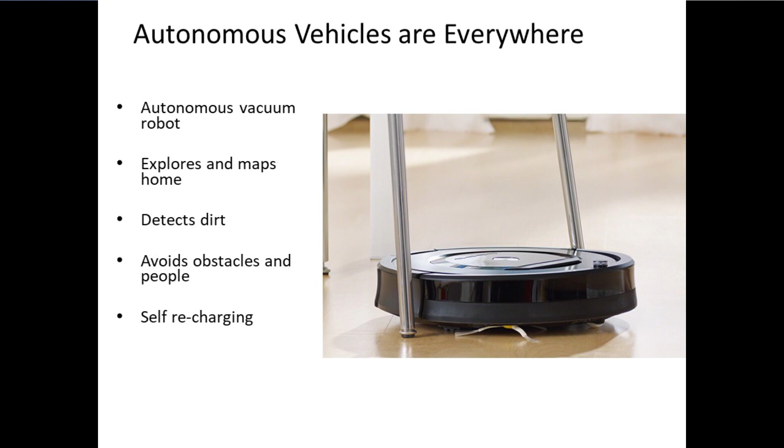In our world today, autonomous vehicles are everywhere. One of the most common examples is an autonomous vacuum cleaner. Even though they can be frustrating when they don't work, an autonomous vacuum is an amazing piece of technology. It explores your home, detects dirt and obstacles, and recharges itself when it's low on batteries.

Another well-known example of an autonomous vehicle is the Mars rover program. The first rover went to Mars in 1997 and remained operational for 3 months. The next rover lasted for almost 7 years and covered almost 5 miles. There are currently 2 operational rovers on Mars that have been there for many years and that primarily operate autonomously, capable of analyzing the environment using a variety of sensors and then broadcasting those readings to Earth.

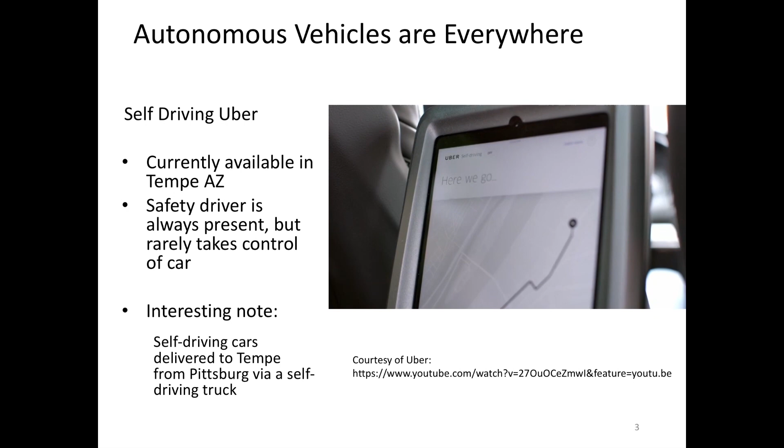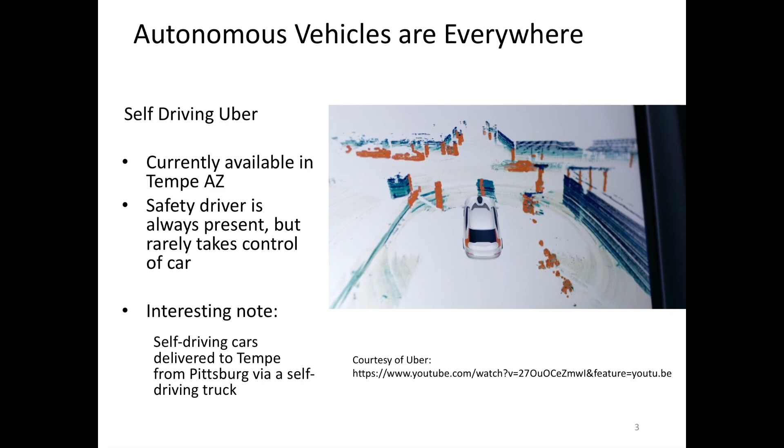Another example of an autonomous vehicle is a self-driving Uber. Prior to the recent accident in Tempe, Arizona, you could order a self-driving Uber where the car is acting completely autonomously, with the driver sitting in the front seat for safety reasons but not operating the car in any way. In the video you see a LiDAR system on top of the car, which is actually reconstructing the environment, will stop for obstacles, and is driving the vehicle autonomously.

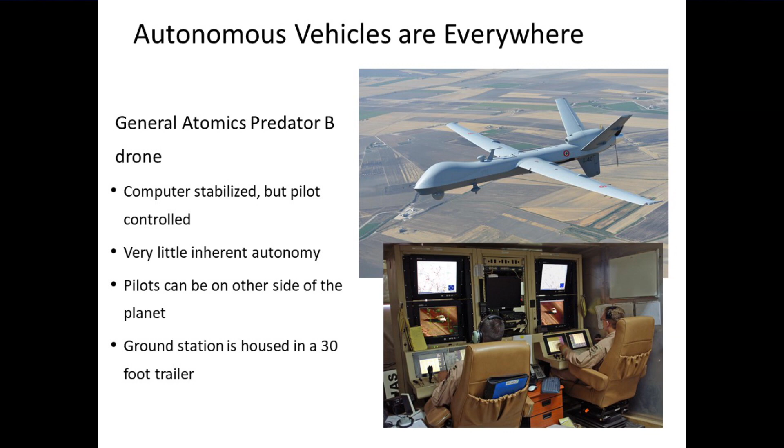As you know, the military has been operating drones for some time. The Predator drone is an unmanned but remotely piloted vehicle, piloted by operators who may be halfway around the world. At the other end of the spectrum, you can go to Walmart and purchase a drone with a camera for less than $100, or buy one off the internet for less than $50. There's actually some pretty sophisticated technology on these drones that uses sensors to stabilize the platform so that operators with very little experience can fly the vehicle.

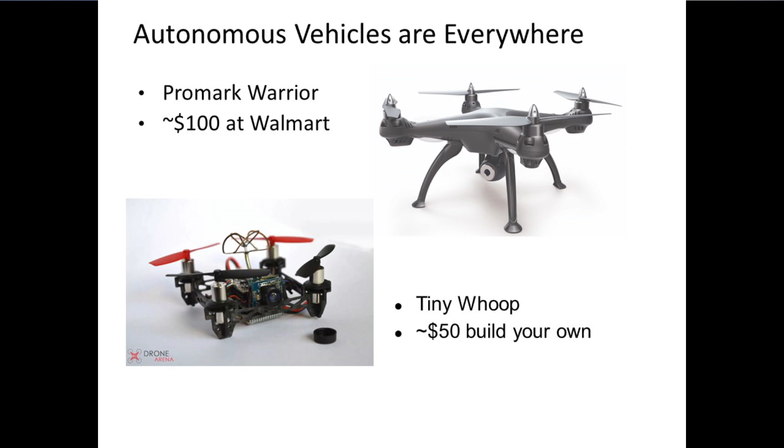Given the wide range of autonomy functions, the self-driving car industry has defined 6 different levels of autonomy, starting with no autonomy at level 0 and moving to full autonomy at level 5. For example, a radio-controlled aircraft, where the pilot maneuvers levers on his transmitter to directly move flaps on the aircraft, is an example of no autonomy, or level 0.

The Predator drone, or the Tiny Whoop drone, where the computer stabilizes the platform but the pilot directs and otherwise flies the aircraft, is an example of level 1 autonomy. The DJI Mavic shown in the previous video, where the pilot gives high-level commands like follow me or fly home and the computer flies the aircraft, is an example of level 2 autonomy.

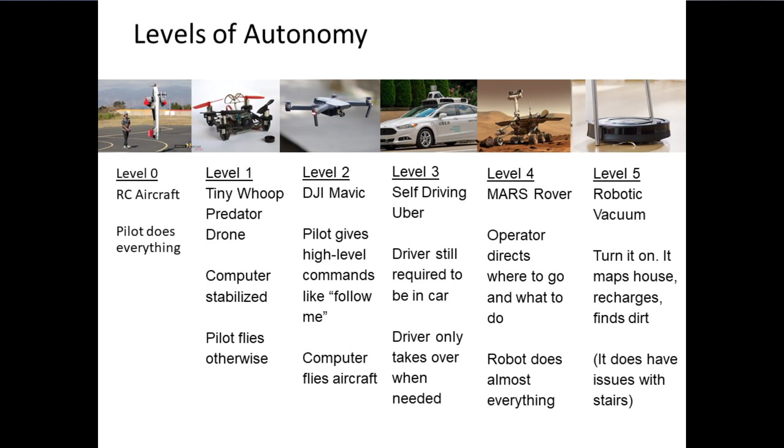A self-driving Uber, where the driver remains in the car but only takes over when necessary, is an example of level 3 autonomy. The Mars rover, where the operator gives very high-level commands but the robot otherwise operates autonomously, is an example of level 4 autonomy. Finally, the robotic vacuum, which in principle can operate without human intervention, is an example of level 5 autonomy. These definitions define the goals and objectives of the self-driving car and self-flying car industries.

There's no question that we are in the middle of a revolution in autonomous vehicles and autonomous machines and intelligent machines in general. But why is this happening right now? In the mid-1990s, when I started working at BYU, there were four technologies that had recently been introduced to the commercial market that would have significant influence on robotics.

These technologies would enable the current boom in autonomous and intelligent systems. The first is the Global Positioning System, or GPS. GPS was developed during the 1970s, primarily for the military. The first commercially available GPS receiver appeared on the market in 1989. The full constellation of 27 GPS satellites became fully operational in 1993, and selective availability, which artificially degraded GPS quality, was discontinued in 2000.

GPS is an essential technology for autonomous systems since it allows vehicles to know where they are on the Earth and to plan and execute maneuvers relative to their location.

The second enabling technology was the development of MEMS gyros and accelerometers. A gyroscope is a sensor that measures angular velocity, and an accelerometer is a sensor that measures acceleration. Gyroscopes and accelerometers are necessary to enable stable autonomous flight of traditional fixed-wing aircraft, helicopters, missiles, and satellites. They were developed and have been widely used in aerospace systems since before World War II.

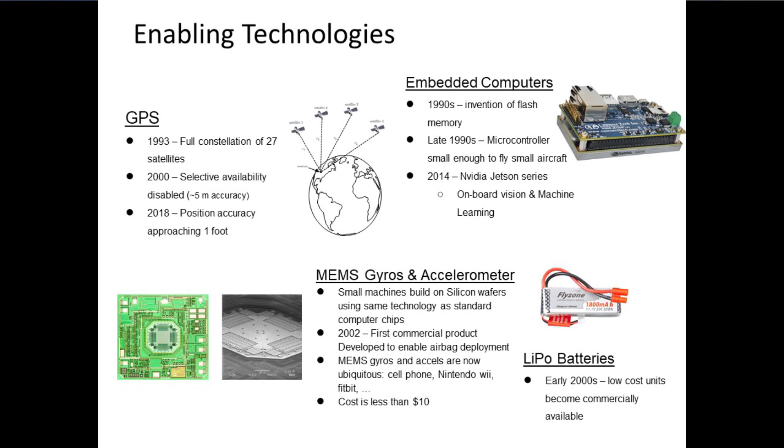The final essential technology for unmanned systems is high-energy density batteries. The lithium polymer battery found in your cell phone was first commercially available in the early 1990s, but it was not practical for use on RC-size aircraft until the early 2000s.

Therefore, in the early 2000s, when we were getting started, there was this perfect storm of available technologies that enabled unmanned aircraft and mobile robotics in general. However, the real enabler has been that each of these technologies are perfectly aligned with their use in consumer electronics.

Each of you here today are probably wearing or have in your pocket a device with accelerometers, batteries, and an amazing computer. And so the economy of scale has driven development and has made these technologies extremely inexpensive.

Self-driving and self-flying vehicles have two types of sensors. First, internal-looking sensors like gyroscopes and accelerometers, or an odometer in a car, and we'll put GPS in that category as well. Also external-looking sensors like a camera, a LiDAR, or a radar. The internal-looking sensors monitor the state of the robot itself.

Whereas external-looking sensors are used to monitor the environment, to detect things like pedestrians or buildings or things that might cause a collision. For example, on a self-driving car, the internal sensors include the wheel encoder and GPS. The external sensors include radar, LiDAR, camera, and ultrasonic sensors.

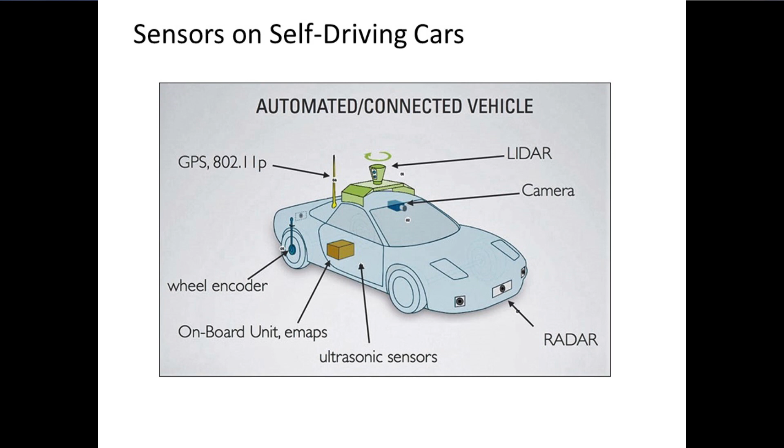The external sensors and the state of the aircraft are the input to a perception algorithm that estimates objects in the environment, like buildings, pedestrians, or other cars. A prediction algorithm then predicts what the environment will look like in the near future, for example over the next several seconds. A planning algorithm then decides how and where the robot should maneuver based on the predicted future.

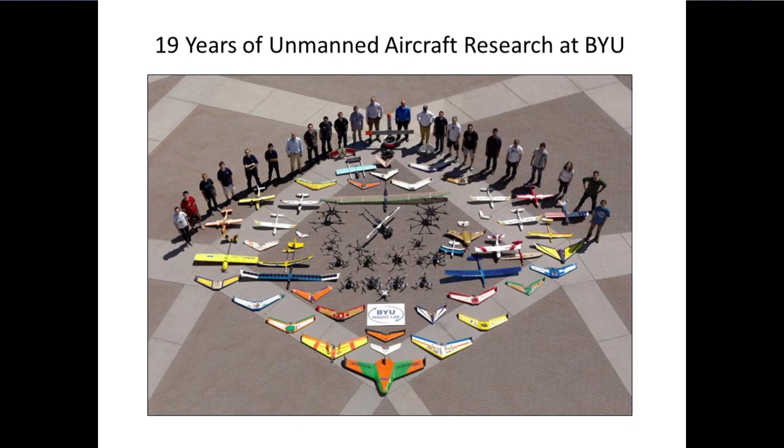For the remainder of this talk, I'm going to provide examples of each of these blocks by discussing some of the work that our lab has been doing in the area of self-flying vehicles. This is a recent picture of students in our lab with some of the aircraft that we work with. Our specialty has been small fixed-wing aircraft, but we are currently doing extensive work with multi-rotor systems as well.

Our research over the years has been focused in four areas. We've worked on cooperative control, where the objective is to develop algorithms that enable robotic vehicles to cooperate to perform tasks. We're currently working in the area of computer vision-based control, where onboard cameras and other sensors are used to reconstruct the scene and then maneuver a flying robot. We've also developed an autopilot system for small fixed-wing aircraft that resulted in a spin-off company and is currently commercially available. This video illustrates some of our early work on the Kestrel Autopilot system.

In the video, you see an aircraft that is flying through Goshen Canyon in Utah using optic flow sensors.

We've also done a lot of work on multi-aircraft systems, including formation flying, as you see here in the video.

This next clip shows one of our only recorded mid-air collisions with a successful recovery. It's hard to crash these things.

This next video shows a project we were working on where you had simultaneous arrival of multiple aircraft at the same point. This is difficult because of wind and other environmental conditions. And of course, autonomous landing.

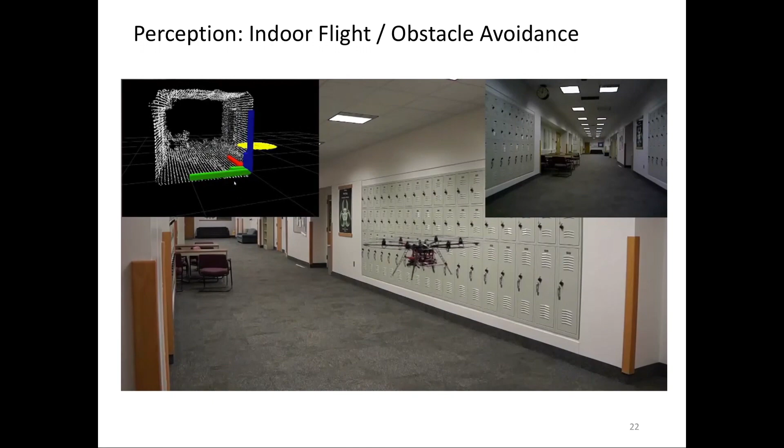You can see in the upper left, the point cloud model, you can clearly see the desk there in the environment that's being reconstructed in 3D from the video feed.

So how does this technology work? The basic idea is to identify similar features in two sequential video frames. For example, strong corners in the image make good features and are easy to identify by looking at color gradients. If the robot moves between frames, then there will be a parallax between the two images, and that parallax can be used to triangulate the 3D position of the features.

This is similar to the way our eyes reconstruct a 3D scene. The 3D position of the features can then be used to create a voxel grid map of the environment, as shown in the lower right corner, and then that environment can be used for subsequent path planning.

Potential applications of this technology include following, for example, a mountain biker through a complex environment. In the video, a 3D voxel grid of the world is being used to maneuver the aircraft around trees.

Another project we've been working on is GPS-denied navigation. In this video, a multi-rotor is navigating through the Fletcher building on campus using several complementary sensors, including an RGB camera, an infrared depth sensor, and a GPS unit that receives occasional measurements when it is outdoors.

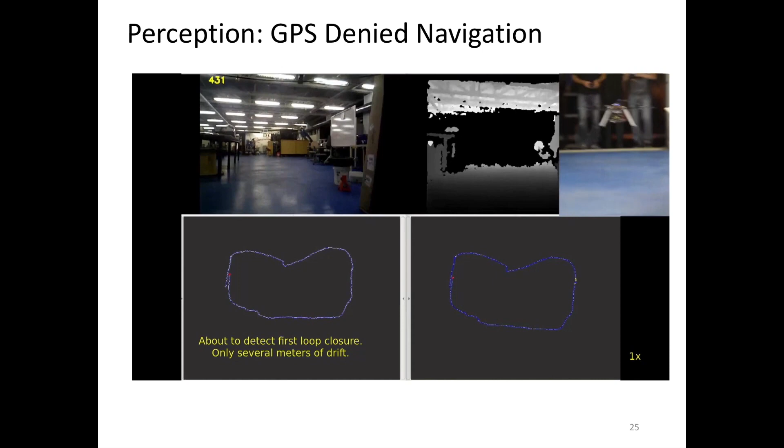The multi-rotor is first guided by a human to close a path in the environment. When it gets back to a position that it recognizes it's been before, you'll see in the lower right small yellow lines that indicate it has seen that position before. When it recognizes a position it's been before, it optimizes the map, and at that point can navigate autonomously relative to that map.

At some point, when it's outdoors, it'll receive a GPS measurement, as you'll see here in a moment. As soon as that GPS measurement is received, the robot can localize itself in the world. It knows it's on BYU campus, for example.

So how does this work? The robot begins in an unknown location, at least unknown to itself, and takes an image of the world, or a keyframe. It then moves and compares subsequent image frames with the original image to estimate its motion relative to the keyframe. It continues this process until most of the original features go outside the field of view, then establishes a new keyframe.

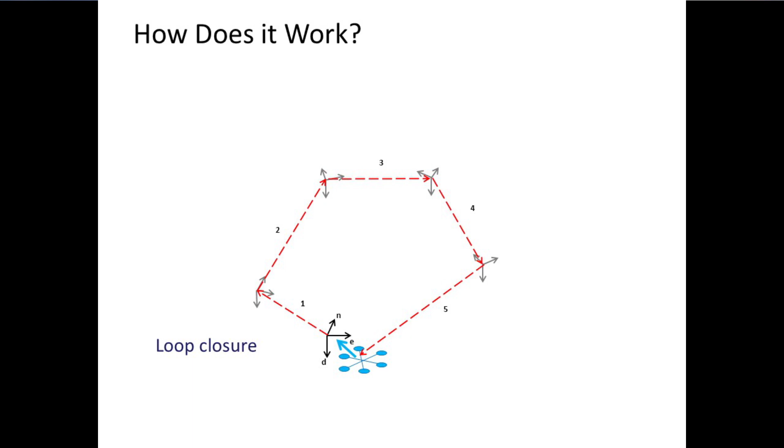The process continues until the robot recognizes that it has returned to a previous location, which we call a loop closure. The motion around the loop is then optimized to resolve discrepancies caused by noise in the sensors, producing a consistent estimate of its motion.

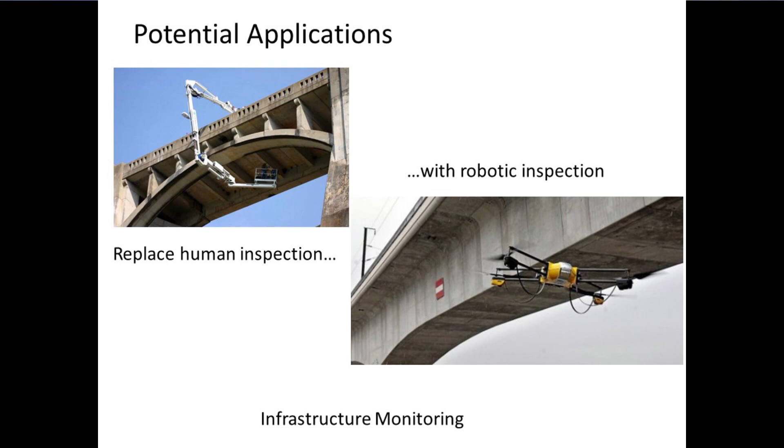There are many potential applications of this technology, but some include bridge and other infrastructure monitoring where GPS signals are intermittent or non-existent. I'll now talk briefly about prediction and planning.

This video illustrates a project we had several years ago where the objective was to use onboard computer vision to land an aircraft in the back of Dr. McLain's truck. The computer vision algorithm is looking for the biggest red object.

Of course, sometimes things don't always work out so well, and when it's looking for the big red object, it hits the tailgate. We were just glad it didn't hit the stop sign in the background.

So how does this technology work? The basic insight comes from ship navigation and missile guidance. The aircraft will be on a collision course with the truck if the truck remains stationary in the image plane of a forward-looking camera. Ship navigators use this idea to navigate relative to lighthouses.

Therefore, the aircraft is maneuvered so that the truck, or the largest red object, remains stationary in the image plane. Again, there are many applications of this technology, but some include drone package delivery - we're all waiting for that on campus, right? - and military convoy support.

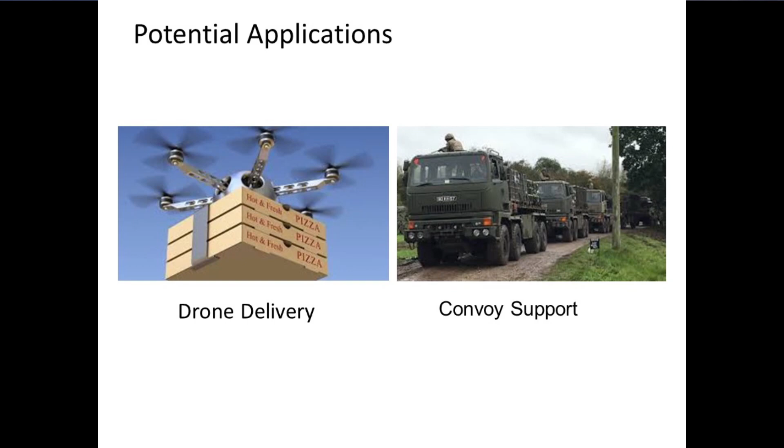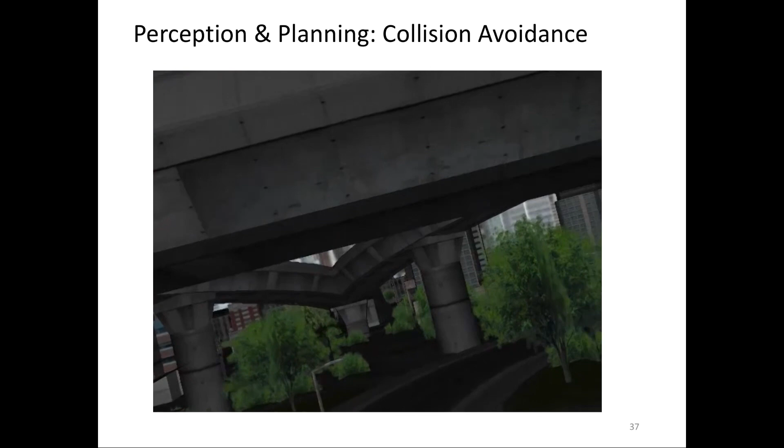Another area of research in our lab is path planning and collision avoidance. This video shows a simulation of a fixed-wing aircraft flying through a cluttered urban environment using computer vision to avoid obstacles.

So how does this work? Consecutive video frames are processed to create a depth map, as shown in the lower left of the video. The depth map is then processed to segment distinct objects in the environment, creating a low-resolution, robot-centric 3D map of the world, as shown in the upper right.

And then a path planning algorithm is used to create a trajectory through the world that will avoid obstacles, as shown in the lower right.

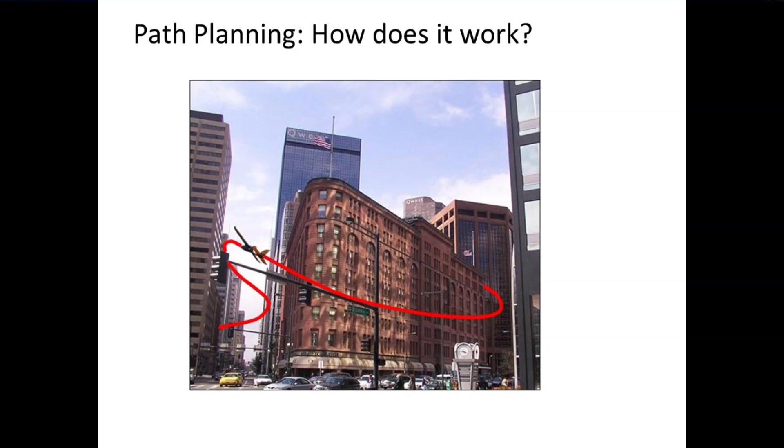So I've mentioned path planning a few times. How does path planning work? Path planning has been an active area of research in the robotics community for the past 40 years. There are many approaches to this problem. I'm going to describe one simple algorithm that's easy enough for me to explain to you, and that is computationally simple and has been successfully used in many different robotic applications.

The technique is called the rapidly exploring random tree algorithm. The algorithm is initialized with a start and a goal location, in addition to the location of a number of obstacles.

The algorithm then randomly picks a point P in the environment and extends a path from the start location in the direction of P. Another random point is generated, and the search tree is extended towards it from the closest point on the existing tree. If a collision is detected, the point is discarded and a new point is randomly selected.

The process continues until the tree can be connected to the goal location. The RRT path planning algorithm, although very simple, has been successfully utilized in a variety of applications, including unmanned aircraft, self-flying cars, driving on slick roads, robot manufacturing, and even solving those little games that you get for Christmas that drive you crazy.

Where is all of this technology going? Currently there are major advances happening in two related areas: autonomous aircraft systems and self-driving car technology. In the future, these technology thrusts will converge and result in the next revolution of self-flying cars.

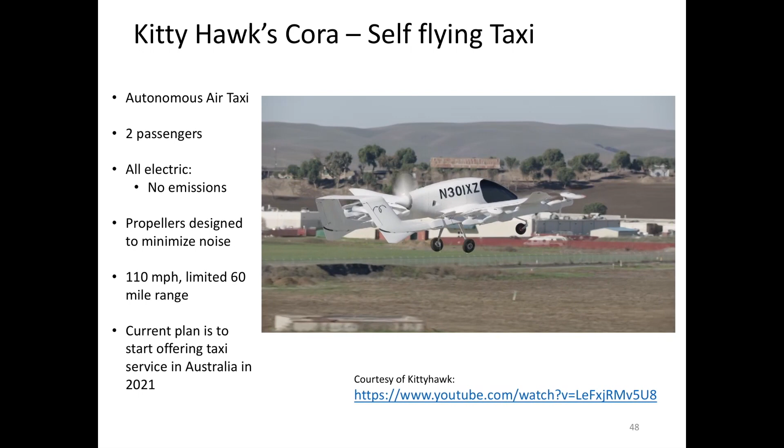In the video, this aircraft is flying completely autonomously. The concept is that the self-flying taxi will operate much like a bus service. You go to a terminal pad, get in the self-flying taxi, use your smartphone to select the next terminal pad you'd like to go to, and the taxi will take you there.

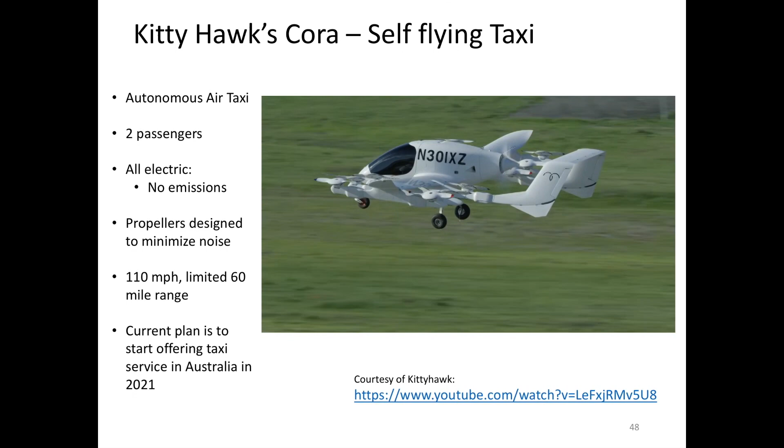The aircraft in this video is an electric vehicle with a limited range of about 60 miles. You'll notice that the upward-looking propellers on the wings are very short and stubby, which reduces the noise pollution caused by this aircraft.

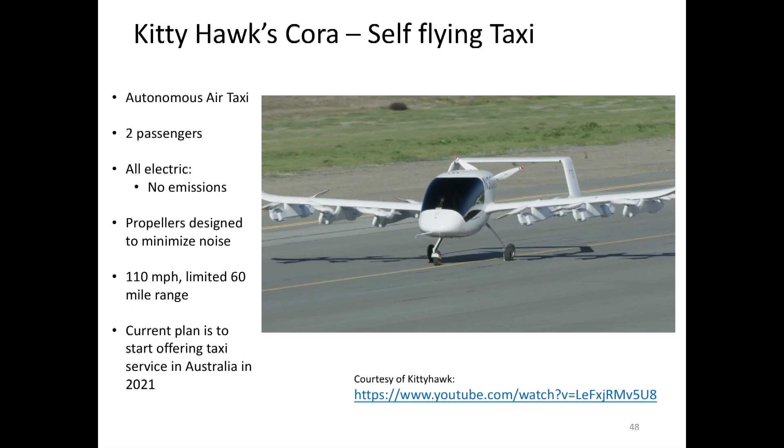This next video is of a recreational flyer that operates much like a commercial drone. This is also a Kitty Hawk vehicle, but instead of an operator using a radio-controlled transmitter, the operator is sitting on the aircraft.

This flyer is also electric, with about 30 minutes of flight time. The idea is that these flyers will first be offered for recreational use until a sufficient safety record is established, and will then transition to a personal flying machine used for commuting and other activities.

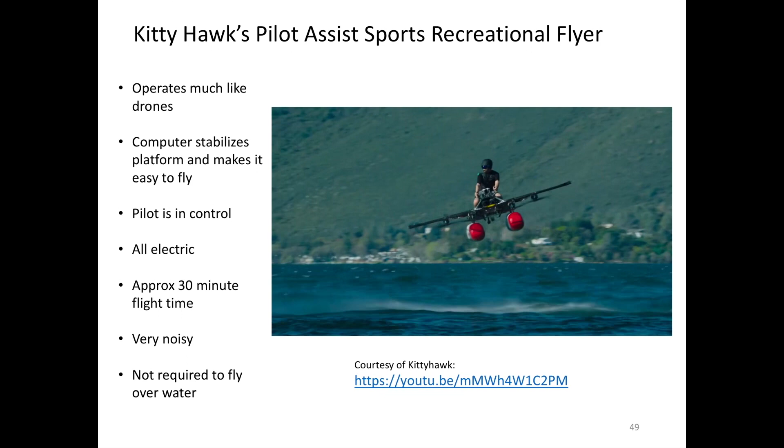I want to note that this isn't a hovercraft, it's actually a flying vehicle. It's not limited in altitude, and it's not limited to water, but the idea is that you would fly it over water until sufficient safety considerations have been addressed.

Doesn't that look fun? There are many other companies developing self-flying cars, many of which have working prototype systems today, and it seems like they're constantly in the news. Before self-driving cars become a reality, there are many issues that need to be resolved.

For example, legal issues. Who is responsible when there is a serious accident? Is it the passenger or the owner of the vehicle? Is it the manufacturer or the software engineer?

There are also ethical issues that need to be addressed. For example, if the brakes go out in a self-driving car and there's a choice to either run into a barrier that will likely kill the driver or turn into pedestrian traffic, potentially killing many pedestrians, how should that choice be made? At the moment, we trust human drivers to make split-second decisions in those cases, and if you think about it, that is a very scary thought.

However, with self-driving cars, we write algorithms that make those decisions, and the algorithms are developed well before the scenarios are encountered. So what is the right answer? Would you buy a car that you knew was programmed to save the most lives possible, even if it was at the expense of you, the driver?

Another issue that needs to be addressed is air traffic management. Self-flying cars add a whole new dimension to safely managing the airspace that is not well suited to our current model of air traffic controllers sitting in towers at airports. Should self-flying cars be allowed to fly anywhere, or do we maintain the notion of roadways or flight corridors?